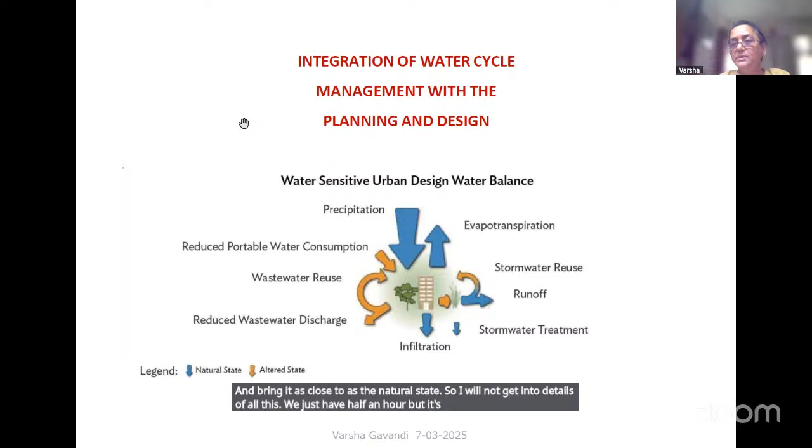So this is just a quick theoretical review of what one is trying to do. The idea is basically to integrate water cycle management with planning and design. We are well aware of what happens in the natural state and in the altered state, and the idea is basically to balance both and bring it as close as possible to the natural state. I will not get into details of all this. We just have half an hour. But it's important to understand what exactly we are trying to do.

The whole objective of this exercise is basically to improve the plant environment, augment water resources, improve their quality, reduce negative impacts of stormwater, and preserve ecosystems in a very cost-effective manner. And obviously, the benefits are numerous. The site or the development becomes resilient, it becomes sustainable, there are ecological, economical, social benefits to this approach.

How do we really go ahead with this? What is the process? As I told you earlier, the ideal way is designing with nature, whereby you understand the larger landscape, the physical or natural layers of your site and the larger landscape within which your site sits, their interrelationships, you map them properly, and then find the suitability for different types of land uses. As I said earlier, very, very rarely do you get this opportunity.

Second, this is understanding and responding to the site landscape, as I said, whether it falls in rain shadow, what is the geomorphology of that particular area, what is the surface, subsurface hydrology layout. So all these things need to be studied, even if we are dealing with, say, a small site of 1 acre in a larger landscape.

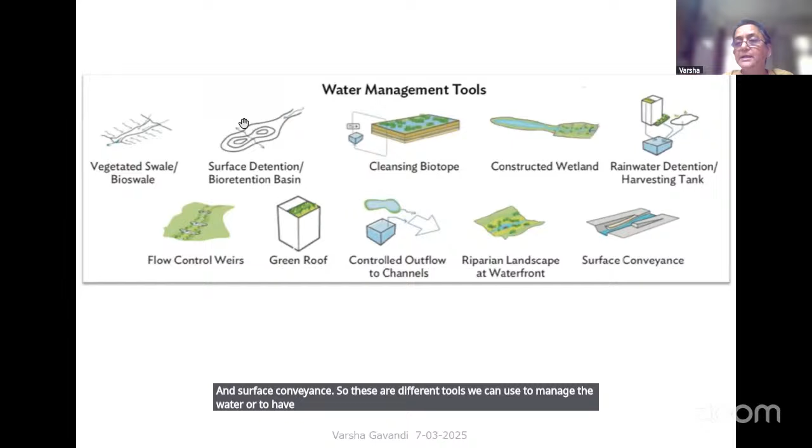There are constructed wetlands, one can harvest water. Then there are flow control weirs, green roofs, controlled outflow channels, riparian landscape at waterfronts, and surface conveyance. So these are different tools we can use to manage the water or to have water sensitive design or site planning. So I'll just take you through some of the examples.

The first example, as I said, is where one, as a landscape architect, is not really involved in land use planning. But once the land use planning is done and it is given to you only for landscape, we as architects, landscape architects or planners, can always expand our scope and educate the client so that at least it helps in the next project. At least they're aware as to what the process should be, at what stage, who should get into picture.

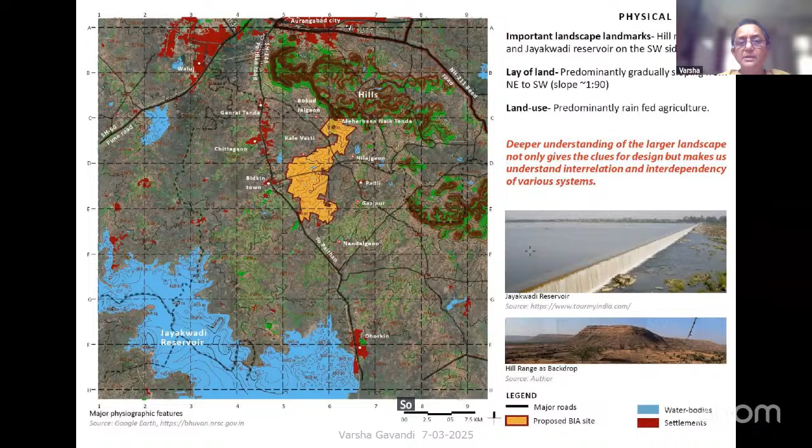So this is a 3,000 hectare site, very close to a reservoir, and on one side of it is hill, and the entire site slopes towards the reservoir. So one has to understand the physical context, climate and hydrology. As I said earlier, for the larger landscape, what is the drainage pattern, and what is the source, where it is leading to. All these things one has to understand, how much water gets generated, and then how much water gets generated within the site.

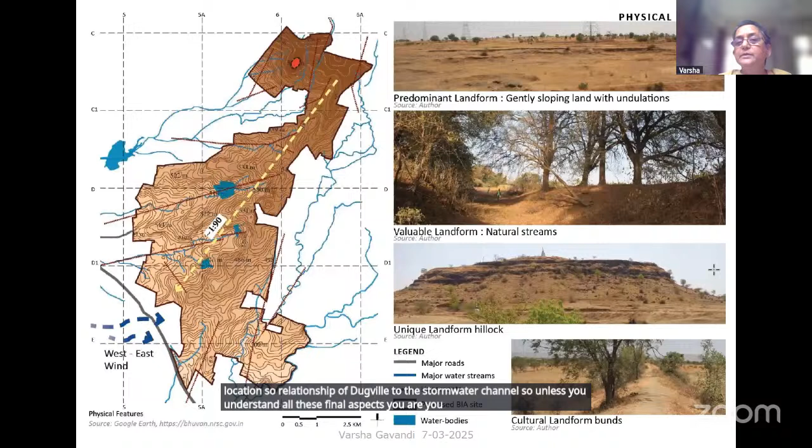You also need to understand subsurface hydrology. That is also very important, because in this particular site, there were lineaments. And because the water table was a little higher, the entire landscape was dotted with dug wells. So you can relate why so many dug wells are there in a particular area, and how they are located within that site. Very peculiar location. So relationship of dug well to the stormwater channel. Unless you understand all these finer aspects, you can't really give justice to the project.

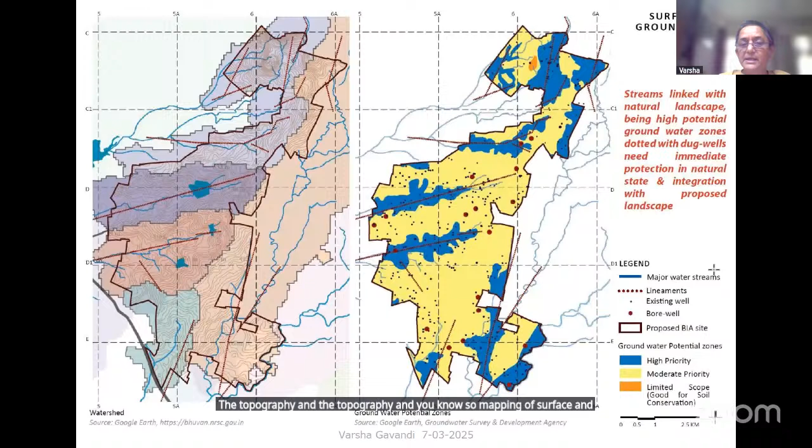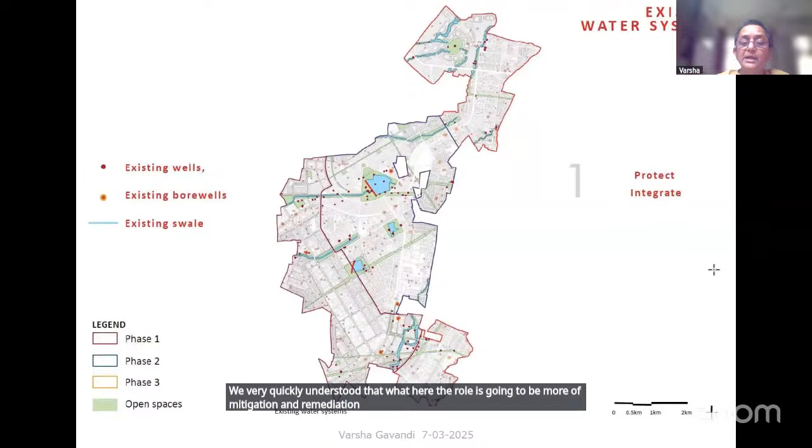The topography, and mapping of surface and groundwater areas. And then you arrive at a policy. Unfortunately, for this particular area, it is only for landscape that one is involved. So we sent our comments on the master plan itself and how it is affecting the natural systems. We very quickly understood that here the role is going to be more of mitigation and remediation, and in some areas where possible, one can protect and integrate.

So then you arrive at your goals. You align the rest of the elements as per the important or major elements, like for example, vegetation. So it was observed that all along the gullies or all along the seasonal streams, there is a lot of vegetation. There are wells. So obviously, it automatically tells you that these areas are ecologically important areas, and they need to be handled very carefully. They need to be integrated within the development very carefully.

Because this is an industrial township, the proposal for the streams was to channelize them. Some part they had already channelized. And so we had to really fight with those people to make them understand that they have to be rehabilitated. They have to be brought back close to their natural state by changing the section, by developing the banks in a certain fashion, understanding flood lines and things like that.

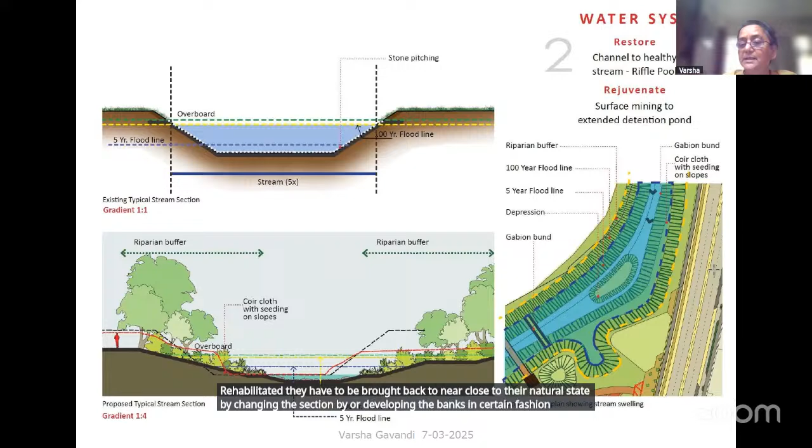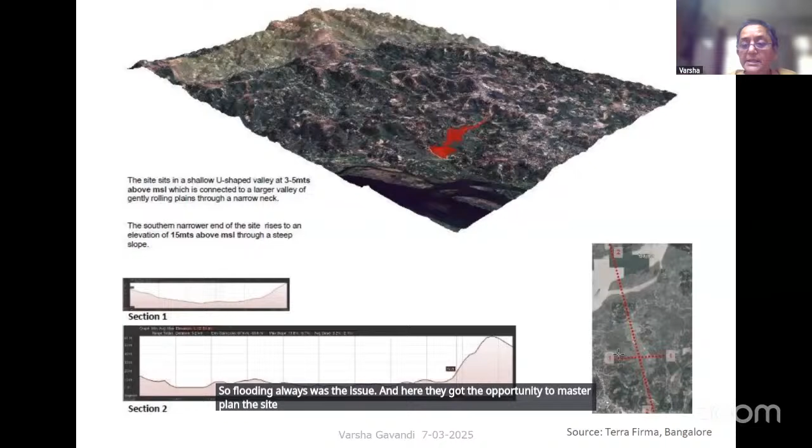There is another example by a renowned architect from Bangalore, Terra Firma, where the site is placed in a shallow U-shaped valley which is just 3 to 5 meters above mean sea level. So flooding always was the issue. And here they got the opportunity to first study the natural parameters and then really come up with the site plan.

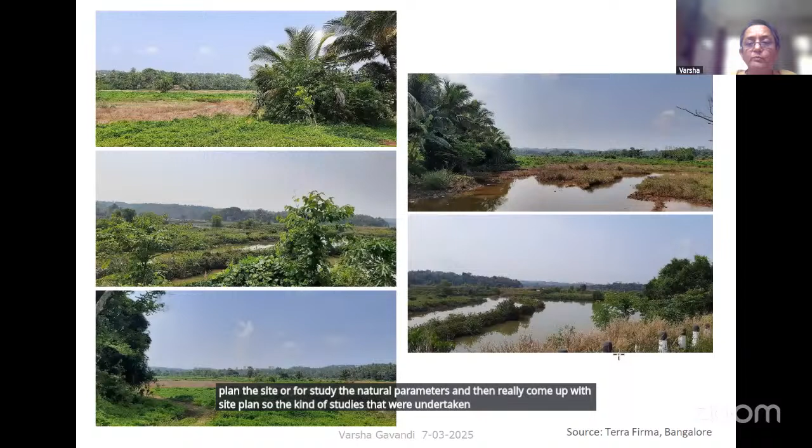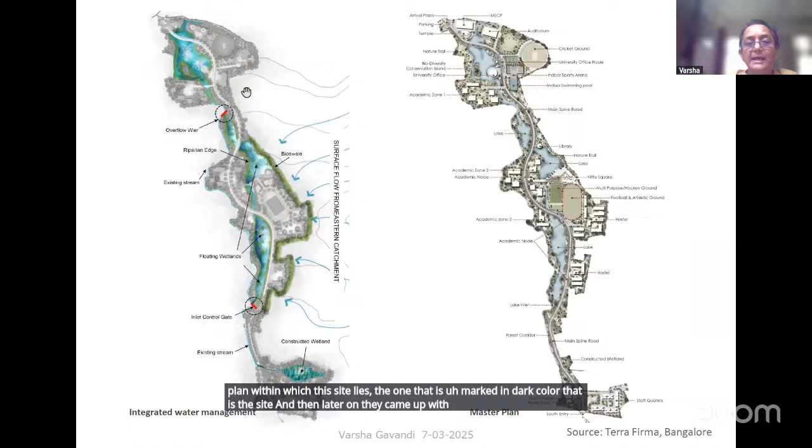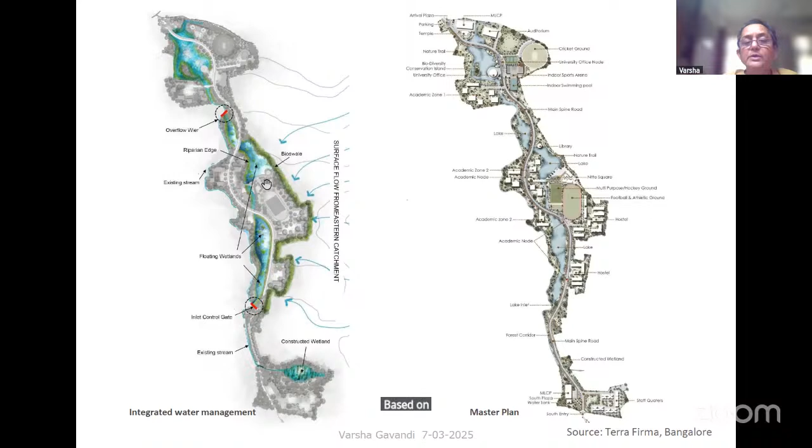So the kind of studies that were undertaken: understanding the catchment, watersheds, sub-watersheds, then the visual surveys. So this is the overall watershed plan within which this site lies; the one marked in dark color is the site. And then later on, they came up with this integrated water management plan, where constructed wetlands, bioswales, overflow weirs, control weirs, riparian edges, all those formed part of the entire scheme. This was for flood mitigation, for protecting the site and development, as well as directing the flow of water. So based on this, development areas were identified and finally the master plan was developed.

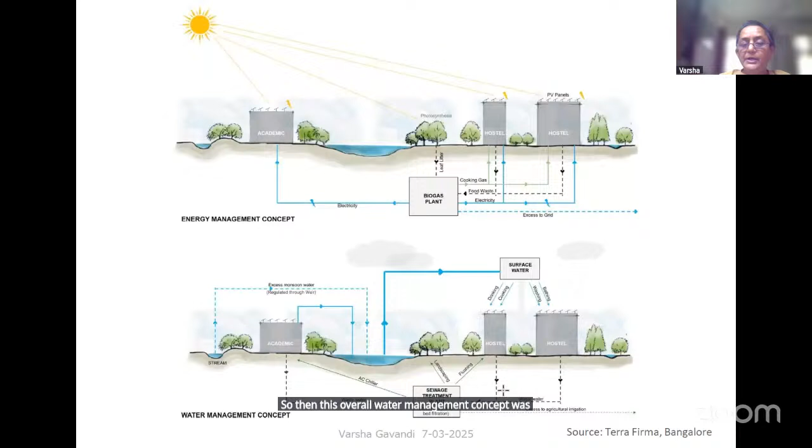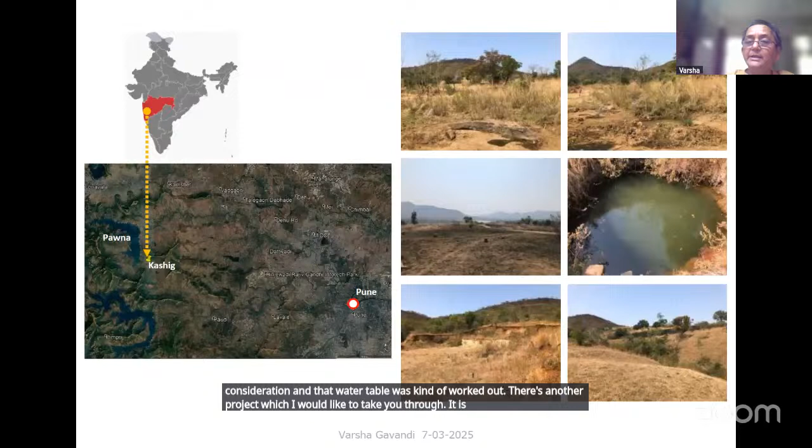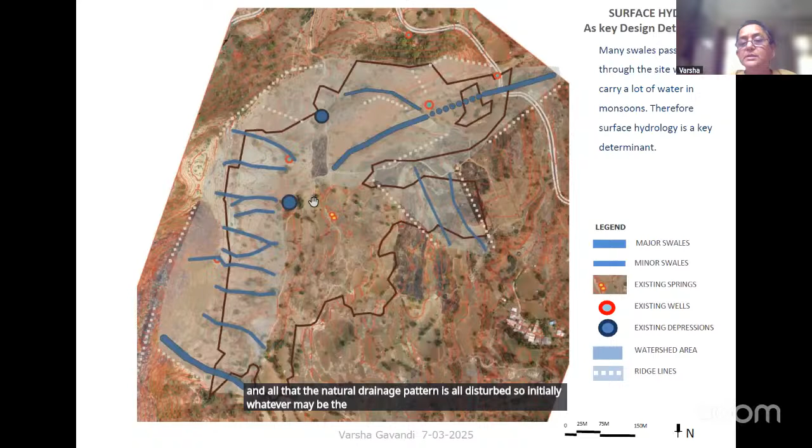There's another project which I would like to take you through. It is in a high rainfall hilly area, basically. The dotted line on the left-hand side is the ridge, and this is in a source area. So this is from where the natural drainage channels begin. And then when they come to the plains, because of farming and all that, the natural drainage pattern is disturbed because of the cultural landscape in that area.

And you also have natural streams. You have wells and existing depressions and things like that. So the plan over here was developing this into a plotted development.

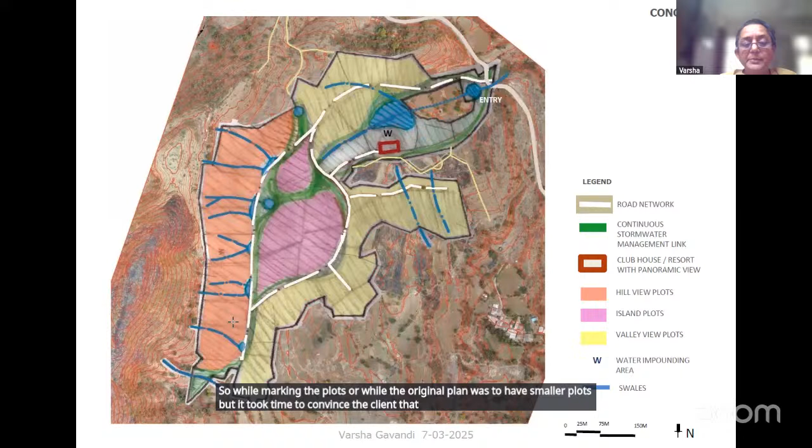So while marking the plots, the original plan was to have smaller plots, but it took time to convince the client that economically they need to see how it works, but at least in the source region, the plots will have to be larger so that the swales are retained and at the same time people get space for constructing to some extent and things like that. But the swales at least will be untouched and they will be retained as they are.

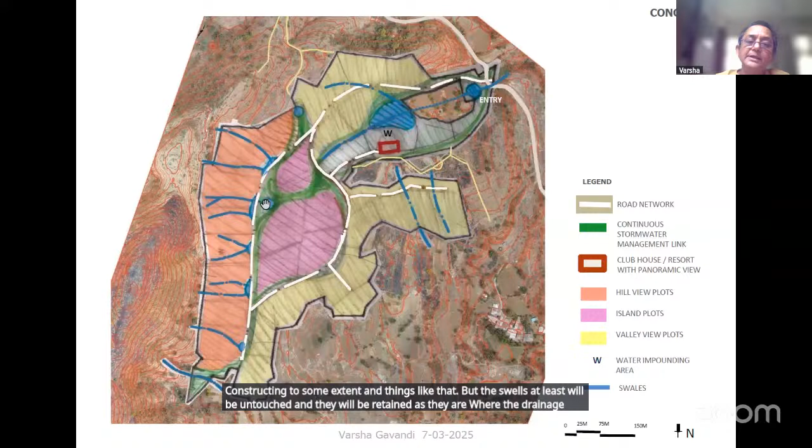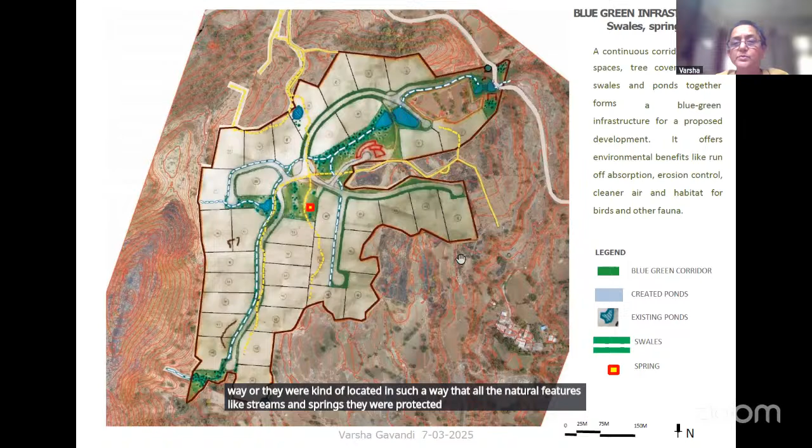Where the drainage pattern was disturbed, green vegetated swales were developed, which took the water through this valley and then beyond the site. And the open spaces were located in such a way that all the natural features like streams and springs were protected. Depressions, streams and springs were protected as much as possible.

So basically, planning is very important based on this. But then detailed design is also equally important because unless you work out those levels, those fine little details to the last detail, if you don't pay attention, the objective may or may not be fulfilled. So detailed design is very important. And I think grading plays a very, very big role in stormwater or water management, surface water management. Also, in some cases, subsurface water management.

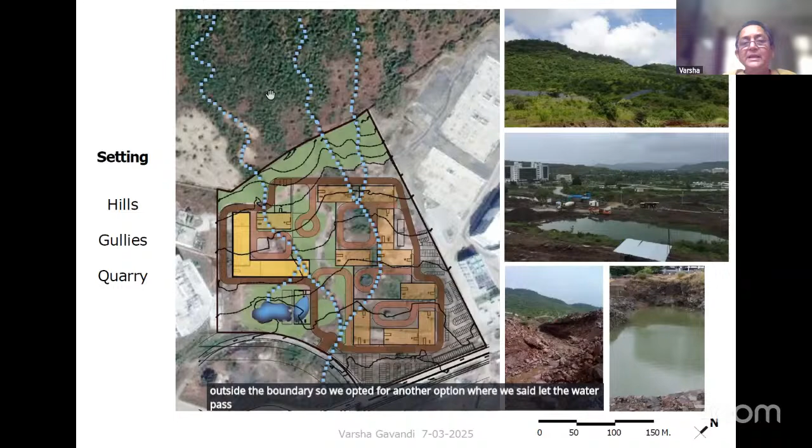So this is another case where, again, it is at the bottom of the hill, not exactly in the source area, but it is a foothill. So part of the hill, bottom of the hill, lies within the campus, and the streams flow through the campus, and they get beyond into an area which is already disturbed and partially so-called developed. So one option was to divert the water outside the boundary. We opted for another option where we said let the water pass through the site, because flow was the theme.

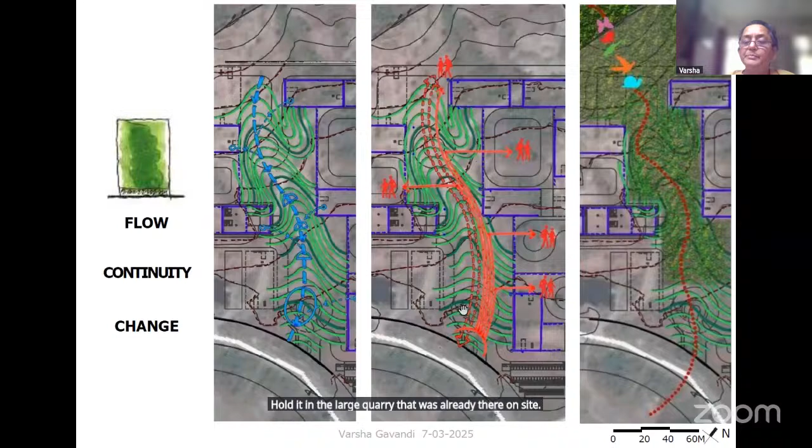So flow, continuity, and change, because this will bring in the change. In monsoon it will be different, in summer it will be different, other seasons it will be different, and this will be an area where people would move, where flora and fauna, in the form of seeds, move. So that was the theme. And what was proposed was basically we develop a valley and bring that water within this valley, hold it in the large quarry that was already there on site, and then beyond the quarry, the water will be left to the rest of the area. So this is how the master plan was developed.

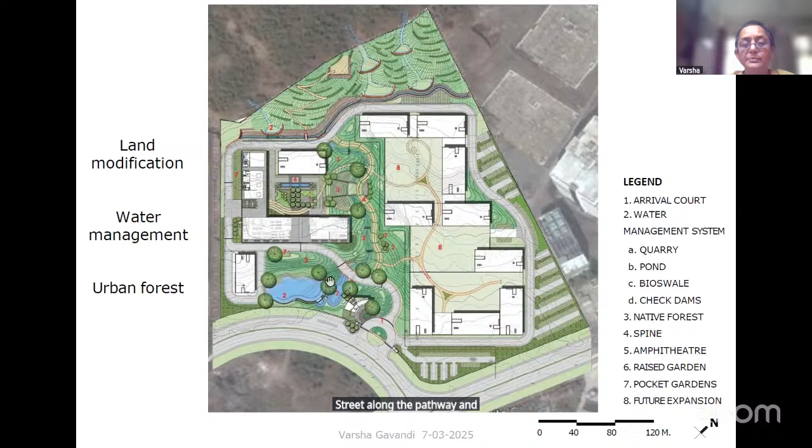Adequate slope treatment was done, like contour trenching, and wherever there was erosion, coir cloths were used, some talis were used to minimize the erosion. The swales had small weirs, so that the water percolated as much as possible. Wherever possible, it accumulated and it percolated, and then finally it came to a swale proposed at the lower area, which flowed below this street along the pathway and got through the polishing pond to the quarry.

So then finally the holding capacity was the quarry capacity. So backward calculations were made. What is the amount of water that we can hold, and what is the amount of water that can be released further? And based on water availability, how much area can be planted, and how can we reduce water consumption later on by using maximum native plantation, giving more emphasis to trees and plantation which is ephemeral. So it grows in season, and it's okay even if it dries off in other seasons. So that is how it was developed.

So this is that swale, and the first season it carried a huge amount of water. Now after a few years, there's a lot of vegetation growing along the stream. Though one thing one needs to understand is these man-made waterways or streams don't really compensate for the natural streams. But this is a midway kind of solution.

If there is no direction to the water, it's better to guide it in some fashion, and it is better to guide it through a vegetated swale rather than a constructed swale. Again, this swale also had weirs so that the water could accumulate for some time. It was allowed to percolate for some time.

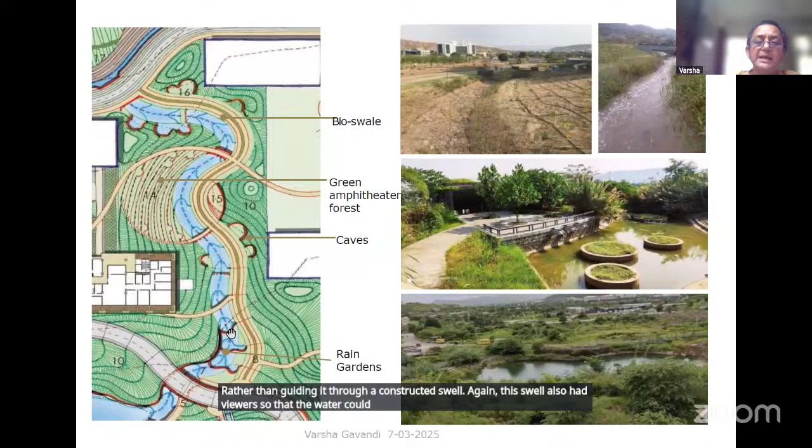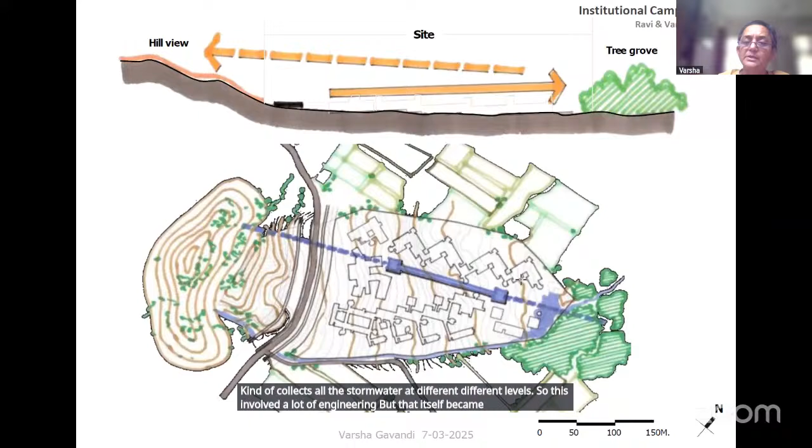So like I said, from planning to detailed design, at times how you deal with levels internally, how you deal with vegetation internally. I mean, vegetation is a different chapter altogether. One can talk for a long time on vegetation and its role in sustainable development. Since the focus today is water, I'll give more emphasis only on water.

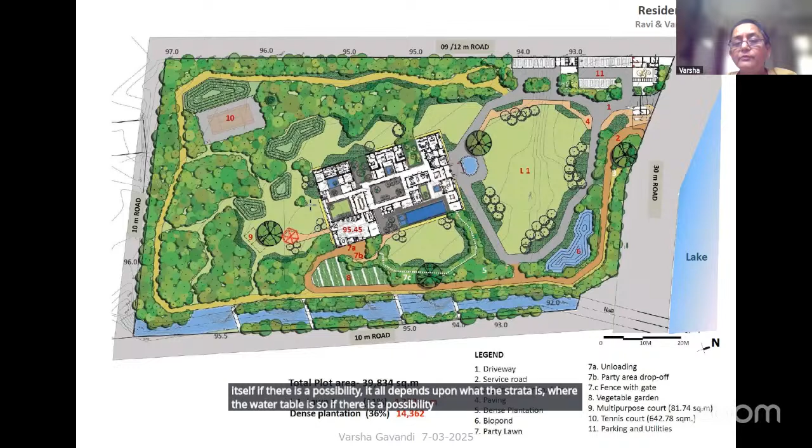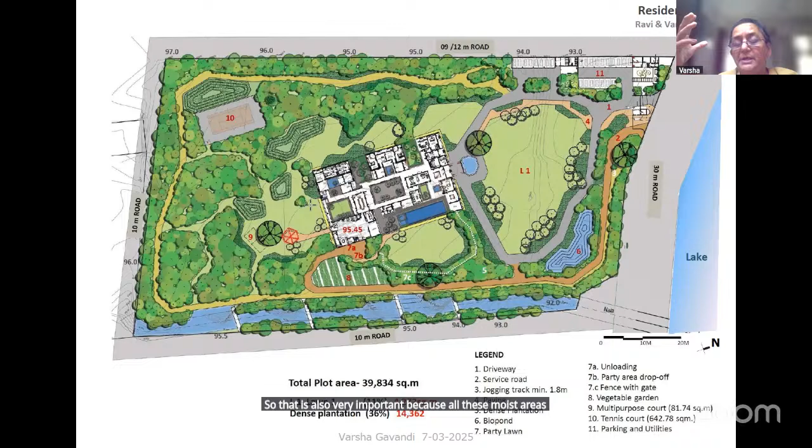So basically, land grading also plays a very, very big role. Within a given piece of land, if you manage the grades in such a way that within the land itself, if there is a possibility, it all depends upon what the strata is, where the water table is. So if there is a possibility, you hold water, recharge water, allow it to percolate, because it reduces the runoff, but at the same time, it creates microhabitats. So that is also very important, because all these moist areas create microhabitats, and they remain moist only seasonally, not throughout the year.

So this map clearly says that the slope is more or less in one direction, but within the site, you could create areas where it slopes away from the structure in every direction, but within those areas there are depressions which hold the water for some time, and then it percolates, and then the overflow of these depressions is only taken forward to the natural stream beyond. So within the site also you can actually play around, and the idea here is to have minimized constructed drains, so that more and more moist areas and percolation is promoted within the site.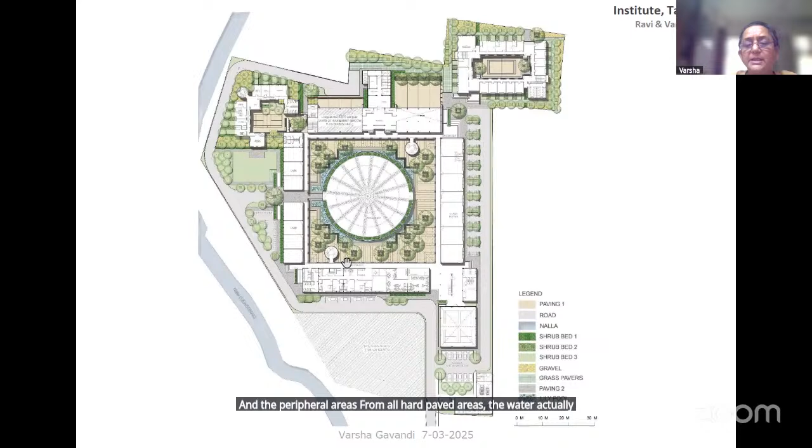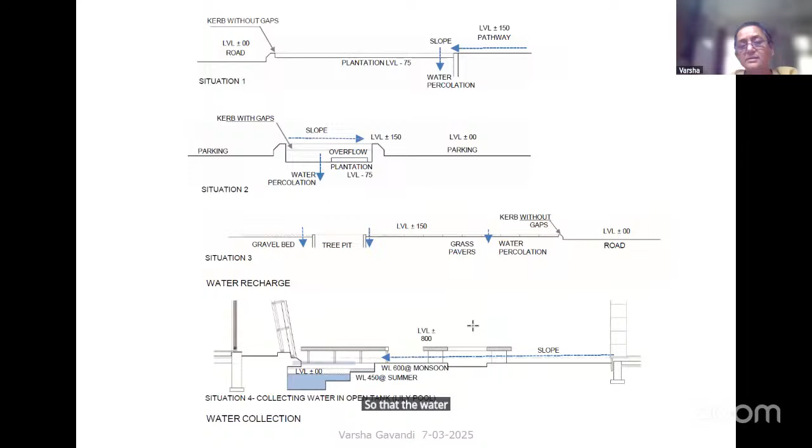So the idea basically was the central courtyard and the building roof, the water was collected within this water body along the courtyard. The water body is designed in such a way that you have summer level, you have monsoon level, and this in itself is treated like an irrigation supply tank for most of the area. And in the peripheral areas, from all hard paved areas, the water actually gets into the vegetation area. So all those areas indicated in light blue are the areas where the water is diverted and allowed to percolate. So then how do you manage curbs, how do you manage levels so that the water gets into these areas, is interesting to work on.

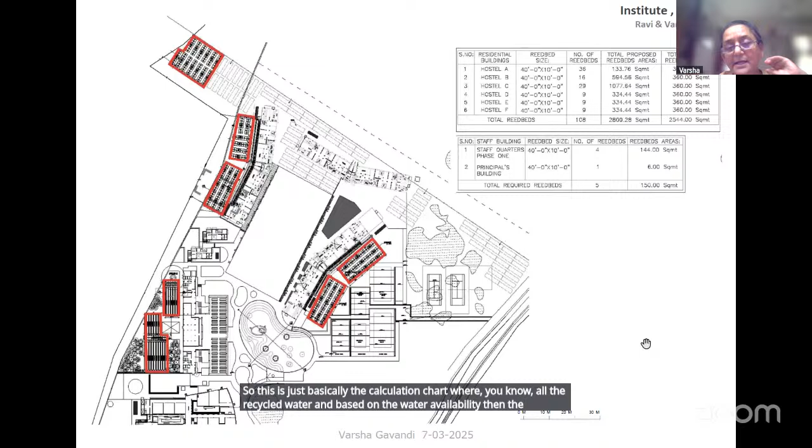Another example where, there being hostels and the population being substantial, the entire wastewater is actually recycled through the reed beds that are indicated. So reed beds themselves become part of the overall landscape. This was in conceptual stage, so they did not take really interesting forms, but there is a possibility of converting this into an aesthetically appealing garden. This is basically the calculation chart of all the recycled water, and based on the water availability, the soft areas or irrigated areas were decided.

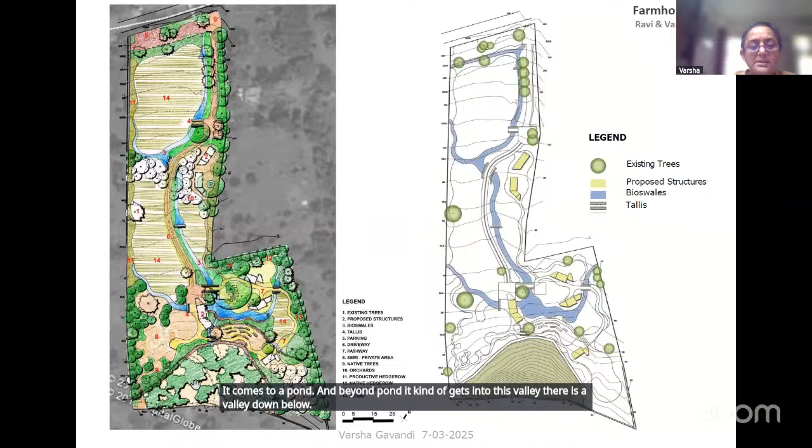Another example where basically a depression is created to separate the areas to control erosion, the soil that flows, because this is all good agricultural soil. These otherwise remain as moist areas all around. There is only native plantation, existing forest is retained. It comes to a pond, and beyond the pond, it gets into this valley. There is a valley down below, and there is a pond at a lower level also. So these are the ponds that are created at different levels.

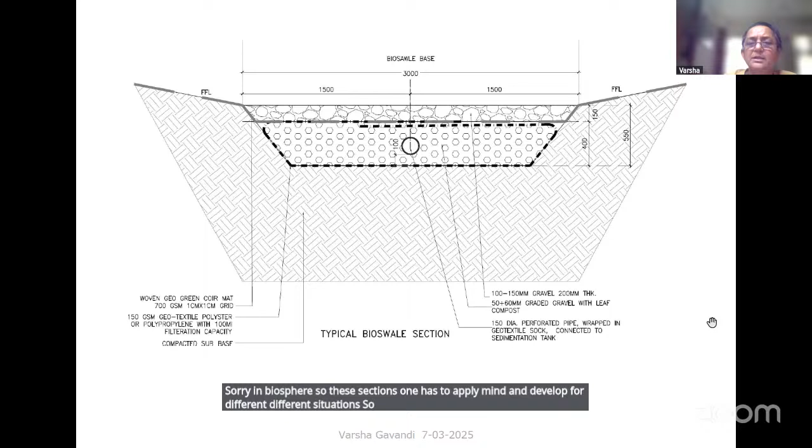Swales, bioswales, even the pond construction doesn't have to be a hard pond. Sorry, rain bioswale. So these sections, one has to apply mind and develop for different situations. We did a substantial amount of research to find out what are the standard sections. Then we realized that it has to be site specific. It has to match your requirements, and it has to serve that purpose. So rain gardens.

Another example where a stream or a water course passes through the site, already disturbed within the site, highly disturbed within the site, and highly channelized by the site above. So it's higher in level, already disturbed by them.

So then basically you can create waterways which eventually look very natural. They function very well because you have vegetation on the side. So things start growing within the water bodies. Even though they are dry during summer, they don't really look unpleasant. So design intervention, wherever possible, you should kind of protect.

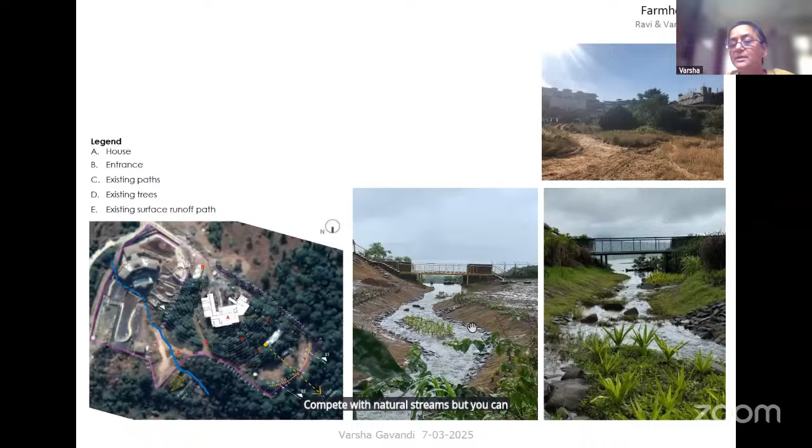But if it is not possible, if they don't exist at all, and if you have to recreate something, you can take clues from nature. They can never imitate, or they can never really compete with natural streams, but you can take clues from nature and really create waterways.

Then within streams, there are certain interventions. There is a very nice book by Dr. Prakash Gole on stream restoration, a very small booklet, which tells you about all these methods of at what place you should have these half moon bunds, which hold the water for some period, and they become habitats for fish.

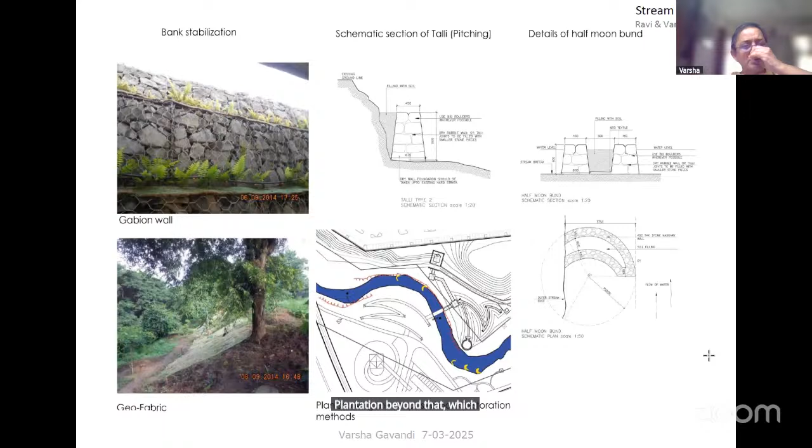So fish ladders within the streams, half moon bunds, and tallis that allow percolation, but at the same time they hold the soil and control erosion. Then coir cloths and liners for the sides where the slopes are eroding, and of course plantation beyond that, which will hold the sites. So all these can be adopted for natural streams which are disturbed.

This also, actually, I had a video, but I was not sure whether I'll be able to play it because it was very heavy. So it is, again, on a high rainfall area. For this particular bund, we took guidance from people who assisted Rajendra Singh ji, and they told us very interesting things: out of the existing vegetation, you can use certain types of dead vegetation within these tallis as reinforcement and things like that.

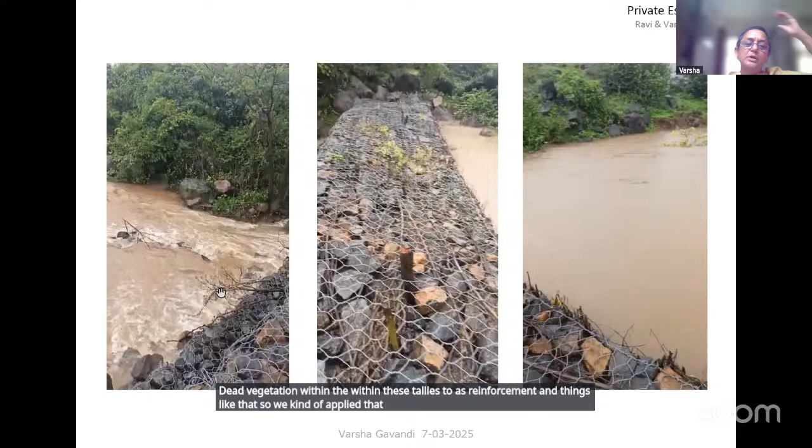So we applied that, and then it holds water for a substantial amount of time, but at the same time it allows the excess water to percolate through. So hard bunds are not always recommended unless they are very low bunds. If they are a little higher, then they should allow percolation of water through the bunds.

Again, coming to detailed design, I think this is the last one. First of all, within any development, we have spoken about water budget and all that, but you can also think of innovative methods and aesthetically appealing details which reduce the plantation area and allow water flow. Because this being on podium, we wanted something which served three purposes: setting for the building, because the building was supposed to be floating above landscape.

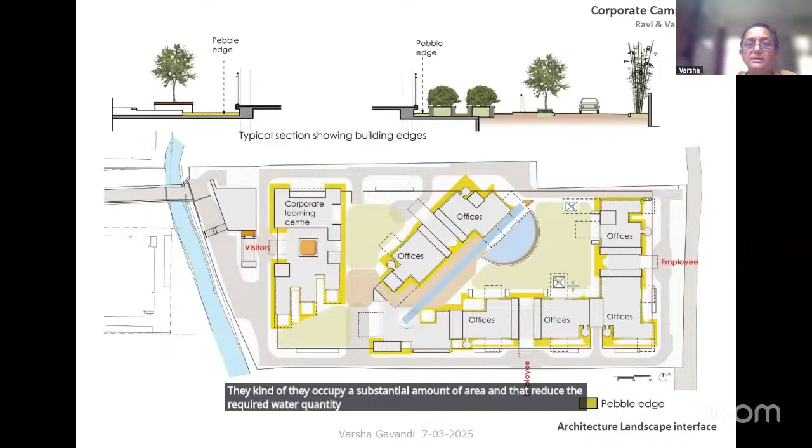Then easy passage for water on the podium slab. So we had to use minimum outlets for the slab, because the slopes carried the water to a certain area. And though these look like very thin beds all along the building, they occupy a substantial amount of area, and that reduced the required water quantity by a substantial amount. So how you choose vegetation, how you detail out the areas, how you create opportunities for water percolation, they matter a lot in detailed design.

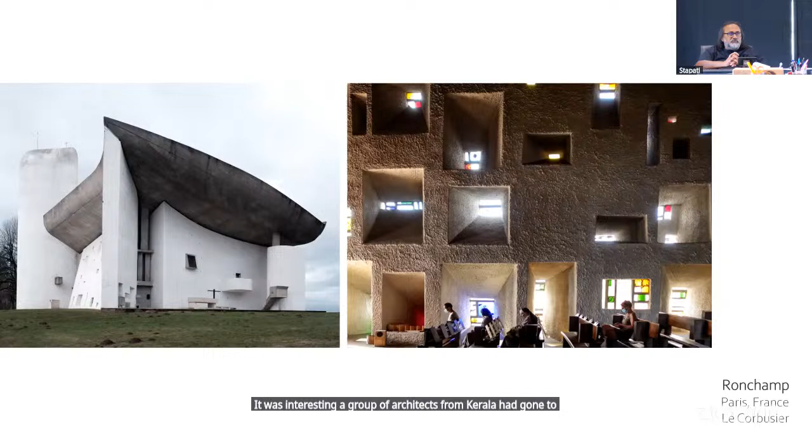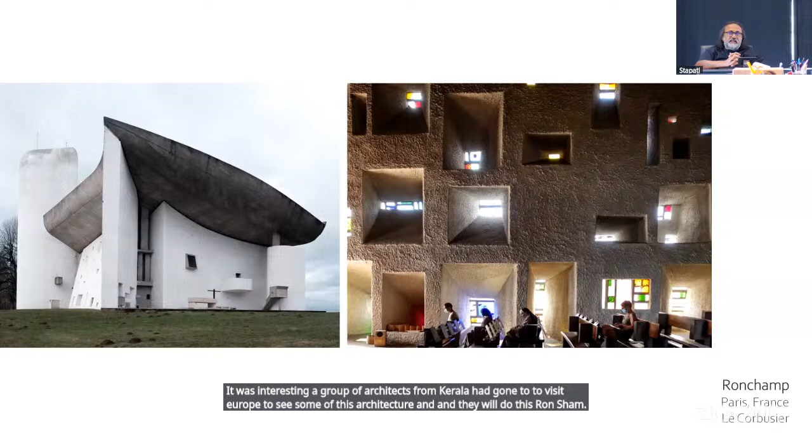And Corbusier, although he was a modernist, a lot of his buildings were very, very emotive. Like one of them is the Ronchamp Cathedral in France. It was interesting. A group of architects from Kerala had gone to visit Europe to see some of this architecture, and they went into this Ronchamp church there, and a few of them were crying. These architects were very serious people who walked into that, and somehow they were so emotional that they cried.

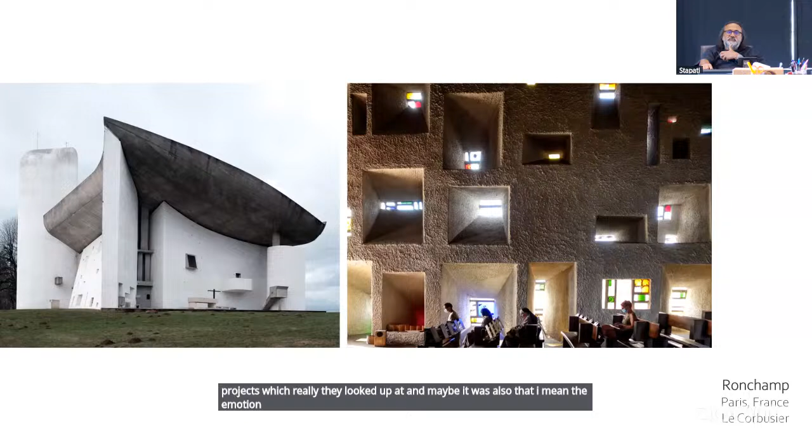Maybe it was not only because of the architecture there, because they were seeing something which in college was one of their projects which they really looked up to, and maybe it was also that. I mean, the emotionality can come due to various reasons. One of the interesting new projects where emotion played a very key part in the design was the Jewish Museum in Berlin, done by Daniel Libeskind. And it was an incredible experience when you go there.

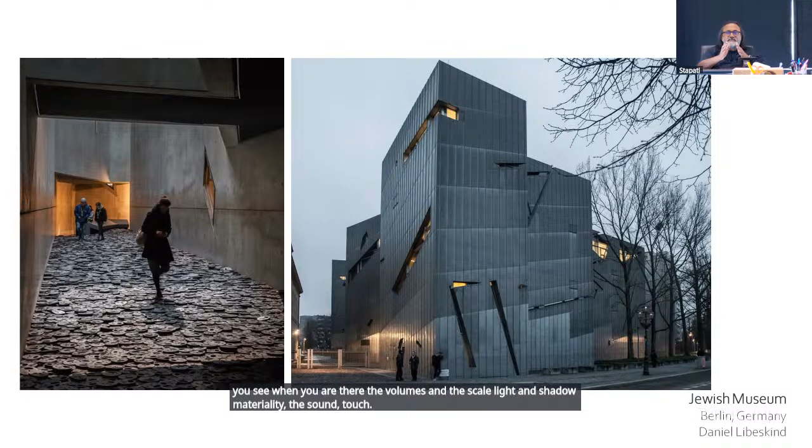Everything about the museum was how to bring back the emotions of when millions were burned by the Nazis. And when you walk through those spaces, the things which you see when you are there, the volumes and the scale, the light and shadow, materiality, the sound, touch, everything played a part in this design. These are the elements which make a building emotional. I mean, these are the things which create an emotive quality to a building.

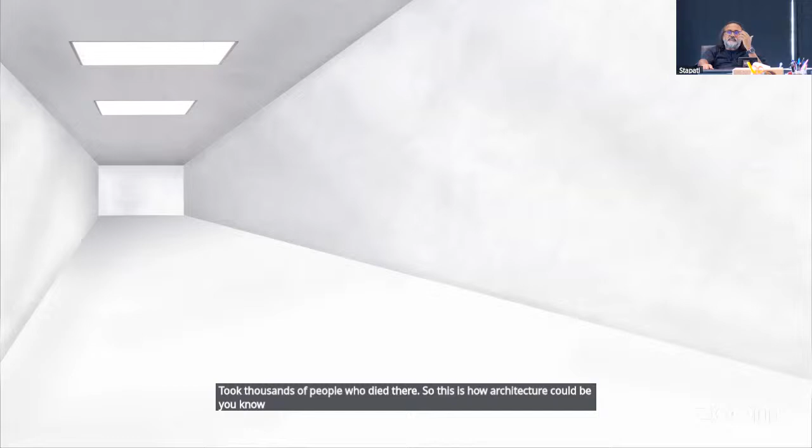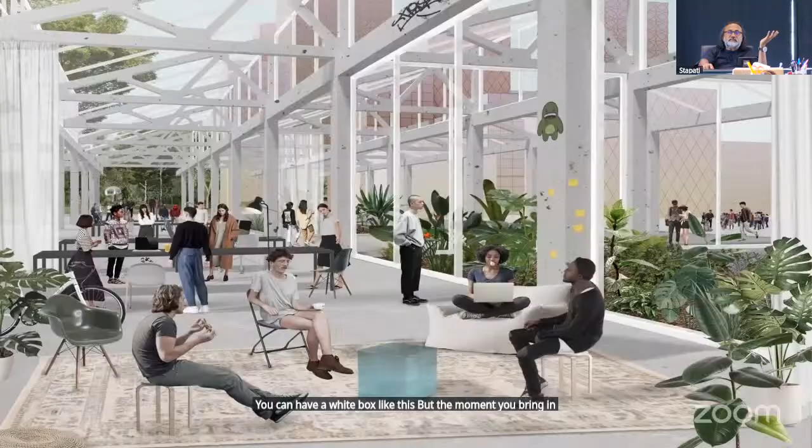You can have a white box like this, but the moment you bring in the same space, you open up the windows, you bring in the trees and greenery, you open it up to the scenes outside, and you play with it, change the flooring, you bring in the materiality and all those things. It totally changes. So this is how architecture can change a space, and this is a simple drawing which illustrates how something can be changed by just making differences in how you do that.

So effectively it is about scale and the space which can make a place emotive. It can be the light and shadow which can play on you. It can be the color and materiality. The materiality can be anything, the textures, the plants, the trees, which can change a space. The sound and touch is a very important thing in changing a space. And all these things combine to create a space. Finally, you say when you enter a space, the space has to enter you. I mean, that is how a good building works.

And Luis Barragan always said that architecture is an art where one consciously or unconsciously creates aesthetic emotions in the atmosphere, and when this environment produces well-being. So that is what architecture should be doing, and that is what we should be trying to achieve.

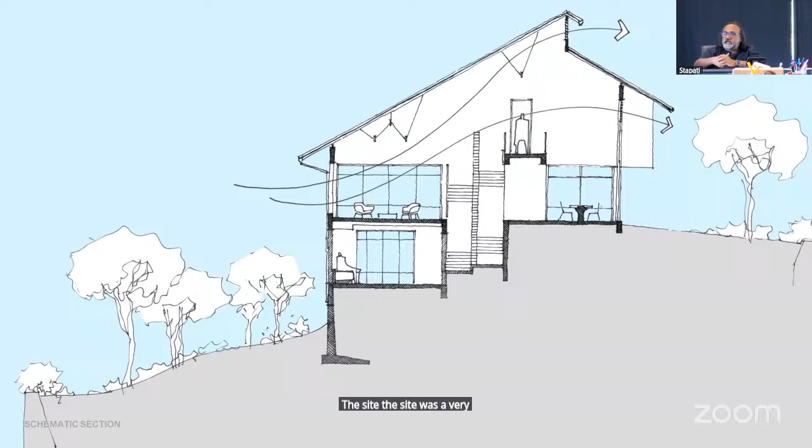So I would start with a project which is in Calicut, a residence. And I have to say it is my own residence in Calicut. There was not a blade of grass on the site. Actually, when we started, it was a sloping site with 1 or 2 cashew trees. That was it, and a lot of rocks and boulders there. It was a laterite soil. Not a blade of grass. I think I started the project 7-8 years back.

And what happens is that when an architect does his own house, he spends the least time. Fortunately, my wife was there pushing me, so I had to go there once in a while. Otherwise, you design and then, until it is somewhat nearing completion, you don't get into it, and you get involved in the finishing part of it. Anyway, the design was taking into consideration the axis and the slope of the land.

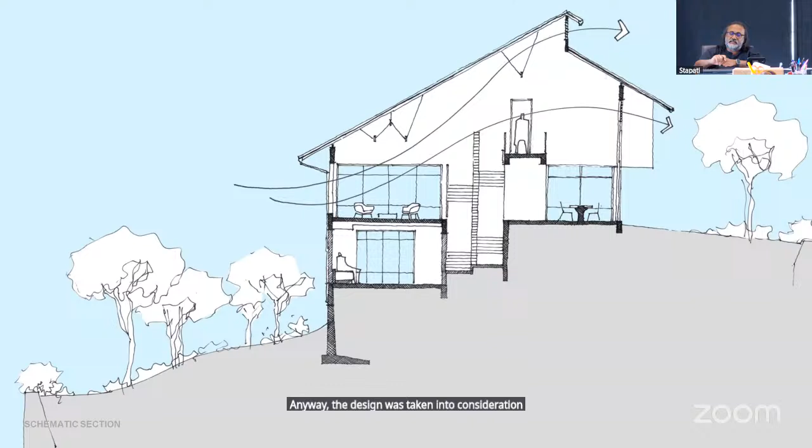And as an architect, you are not like a big businessman. You have to be very careful about the money you are spending there. So every material mattered, every level mattered, everything which we did there mattered in terms of pricing and the cost and the money which was being spent. In a way, it was a blank canvas because there was not a single tree on the site, and there was not even a shrub there.

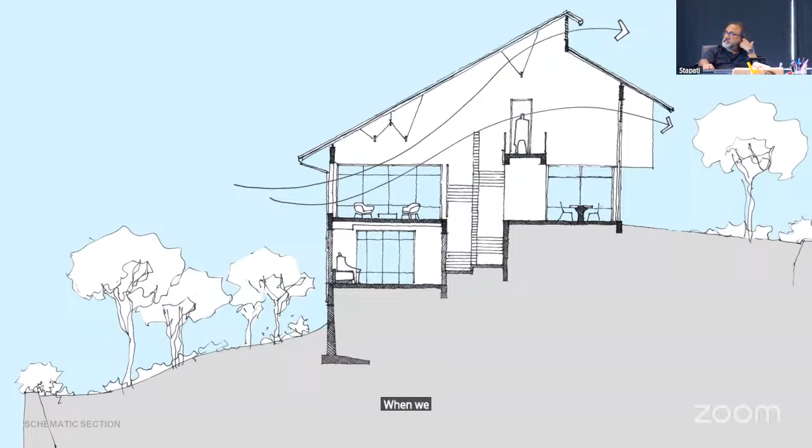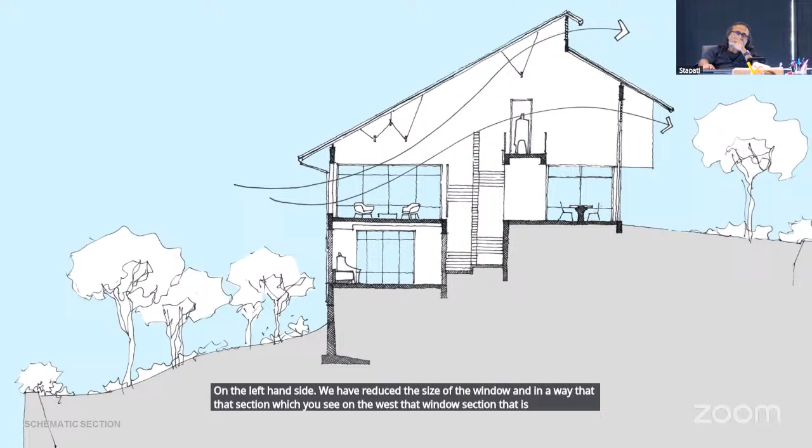So the site on the left side is the western side. When we designed it, we made sure that the eastern side we opened up. On the right side, the eastern side, you have the large windows, which are protected with big overhangs. On the left-hand side, we have reduced the size of the window, and that window section which you see on the west is the only window which has got a double glaze. Even though it's a smaller window, it is a double glazed window.

All the rest of the windows are just a single frame because it is all covered and protected from the glare. On the right side, we have a glass window. On the top, a portion is still only a net so that there is a continuous airflow. There is only a netting on the top. And this portion of the house, the main living area, doesn't have permanent air conditioning. It is only the fans. Even in the worst of summer, we are fine there.

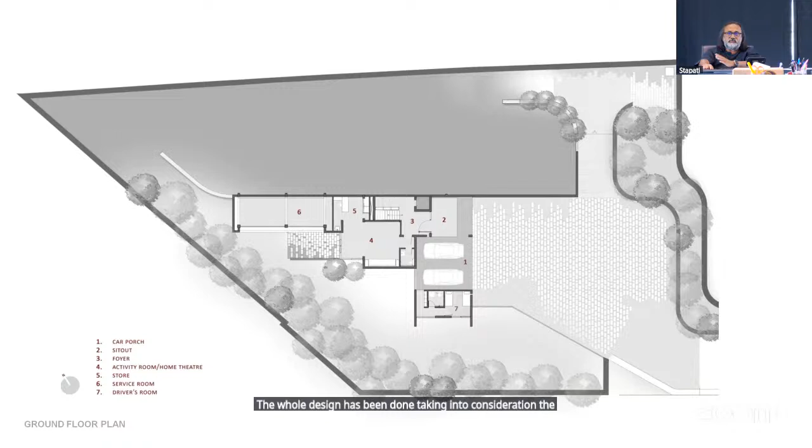So the entry is from the right side. You can see the entry. We enter at a lower level, and so we come into the house. We have the parking and all there. The whole design has been done taking into consideration the slope of the site to reduce the amount of cutting and filling.

Then you come up to the top level where the main house opens up, and in a way this shows somewhat the residence.

And anytime you come to Calicut, you can come over.

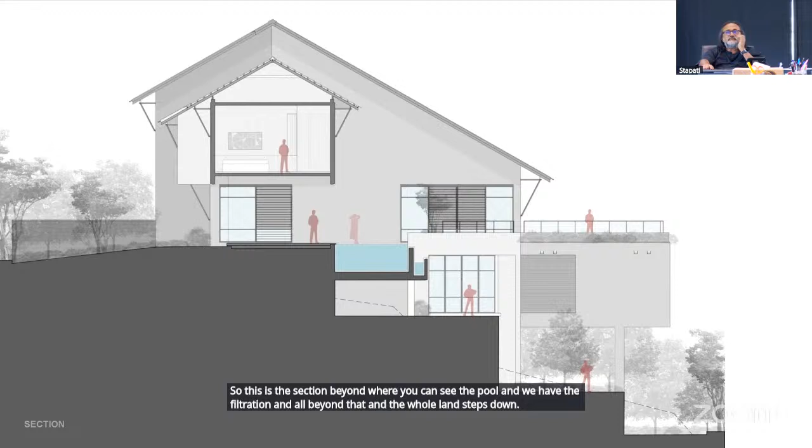So the materiality of the house is kadapa, which is the cheapest stone we can get. The walls are all white cement and cement. No paint has been used in the whole house. Outside it's still only the plastering, which has been buffed, nothing else.

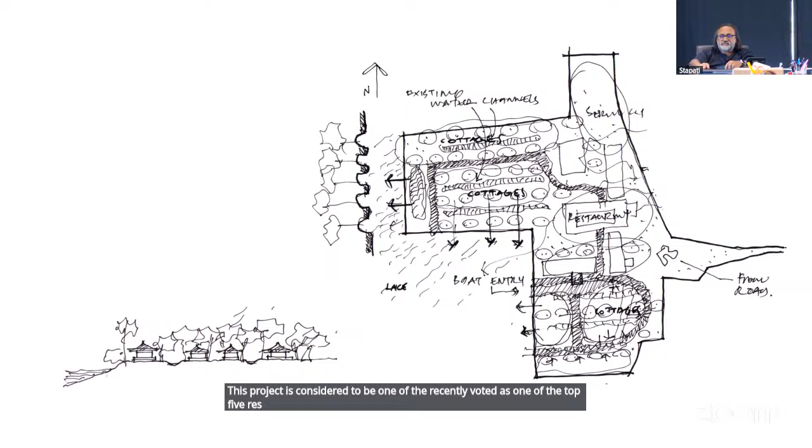Then we have one of the projects which I started about 30 years back, when I was just about 5th or 6th year into my practice. And even 25, 26 years since it started functioning, this project was recently voted as one of the top 5 resorts in India. This is in Kumarakom. It is called the Kumarakom Lake Resort.

And the site, as you can see, was a coconut farm in a marshy waterway. What they did there was dig up a little of this marshy soil, scoop it up and plant coconut trees. So you had all these lines of water body with these coconut plants in between. In the plan, you can see the lines of coconut plants there.

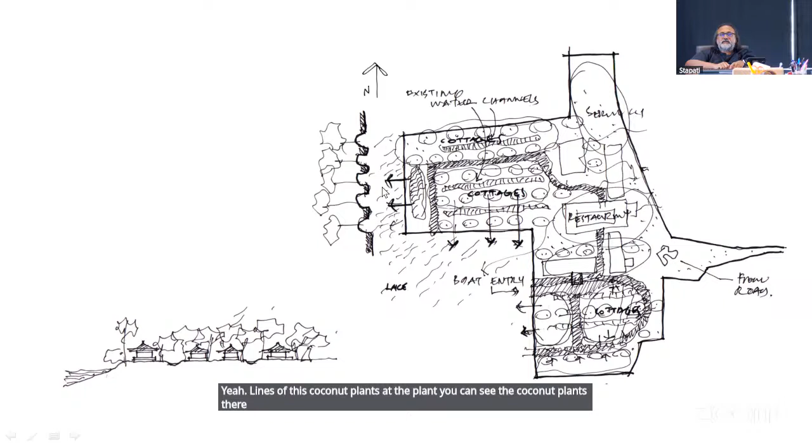I can just show you that. And it was in a way a small coconut plantation there. So if you can see my cursor, can you see my cursor? Yes, sir, we can.

So these are the coconut trees, and they used to have these streams of water there in between, and they'd scoop up that soil and create these coconut patches. Here also it was the same. You had this line of coconut trees. So on the section you can see the coconut tree, the water body, coconut tree, water body.

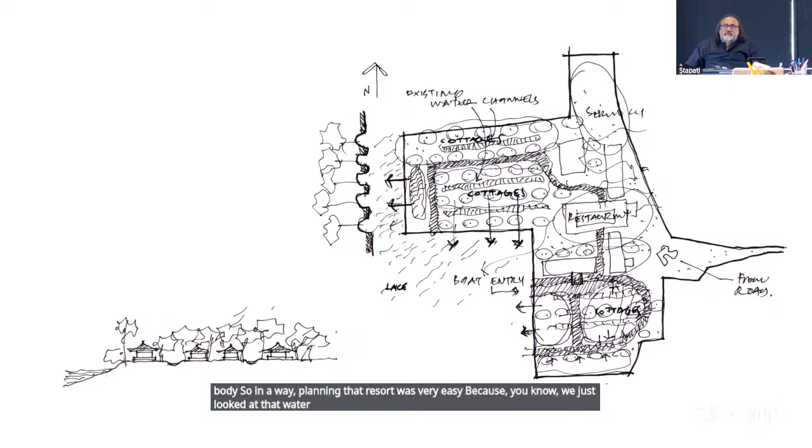So in a way, planning that resort was very easy because we just looked at the water bodies and trees. We tried to retain some of the water bodies and some of the coconut trees, and we just built whatever we wanted there. So in a way, in most cases, the site tells us what to do. And in this case, the site was very clear on what we should be doing.

I started working on it about 30 years back. At that time, Kerala architecture was looked down on by everybody. Everybody wanted very modern architecture. And we felt that we had to bring it back; if a tourist is coming, they would love to see what Kerala culture was all about. So here's a project where we tried to bring back what Kerala was all about.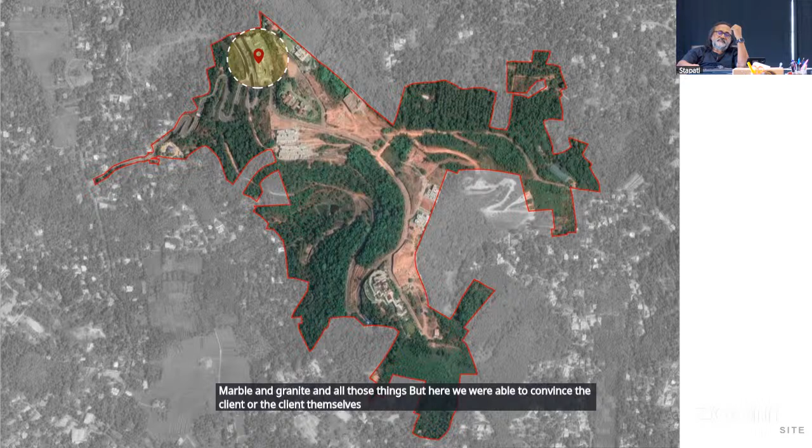Usually when we talk about somebody who's in the business of gold, we would expect a lot of marble and granite. But here we were able to convince the client, or the chairman himself had a lot of clarity on that. He wanted something which went along with nature. The issue was that we had to have a building which could house all their requirements and all their cars. So I think we have to go faster.

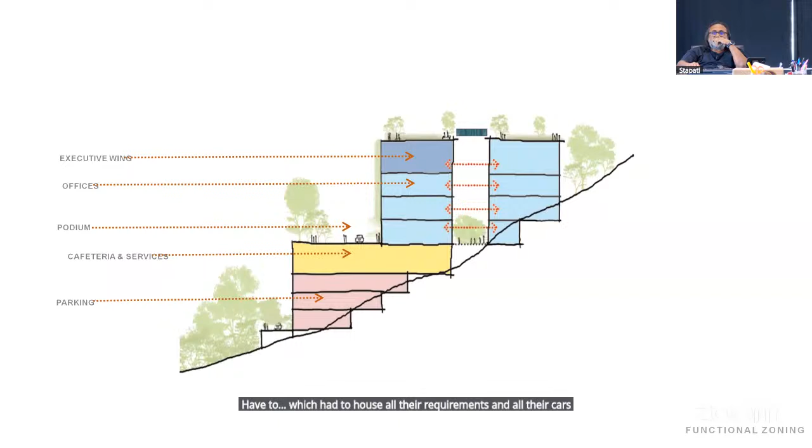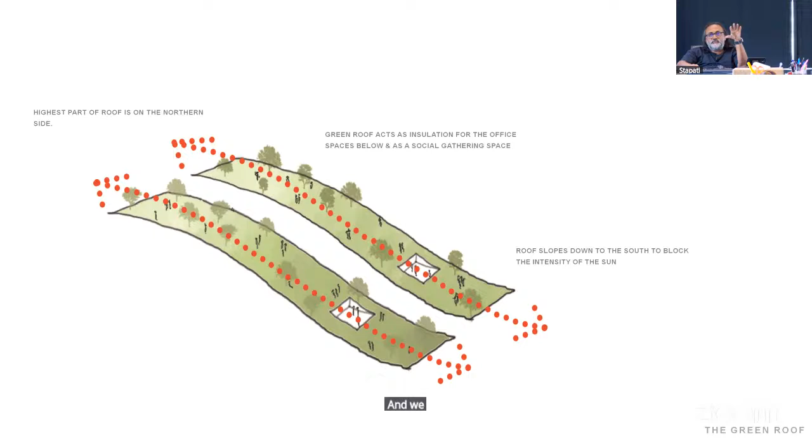So this shows how we could do a large, modern building, and at the same time work along with the context. It was on a hillside, and we decided that it could merge with the ground there. The slope would be towards the southern side, so we could open up the northern side with bigger windows. And on the south, we had landscape which would cut down the heat.

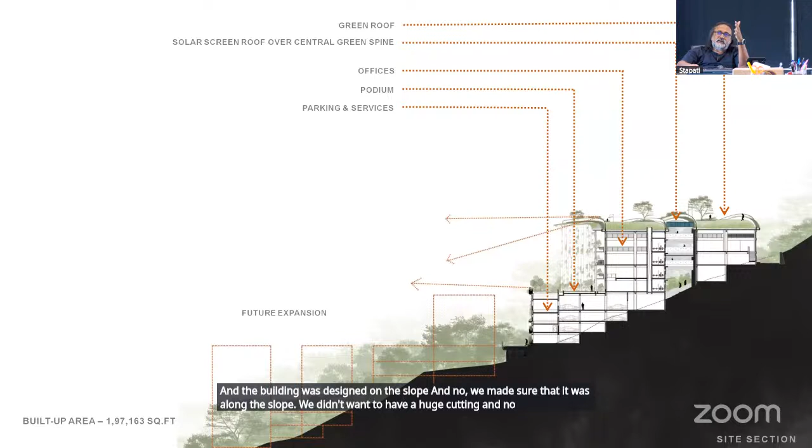The building was designed on the slope, and we made sure that it was along the slope. We didn't want to have huge cutting and destroy the whole landscape, the contour there. Since the hill was on the eastern side, it was blocked from there.

So it was blocked from there. We have created a whole courtyard there in between, so that we have beautiful lighting there. And the west side, the problem was the hill was sloping from east to west, which is against the Vastu. But then they seem to be doing quite well. So at the end of it, more than the Vastu, I think when you go to a design in a site, respecting the land is more important than worrying about the site.

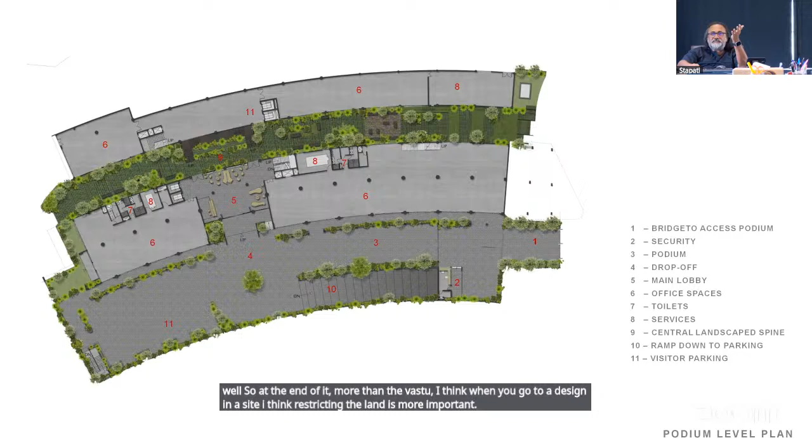I have had issues in many places where if you have a land which slopes to the west, we were asked to build up the west and slope it down to the east. Here, we worked on the existing slope. And this is the internal courtyard which was created. These are the different levels.

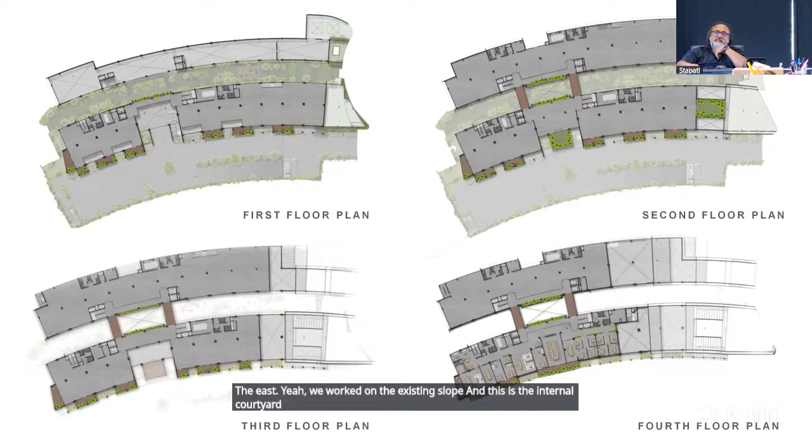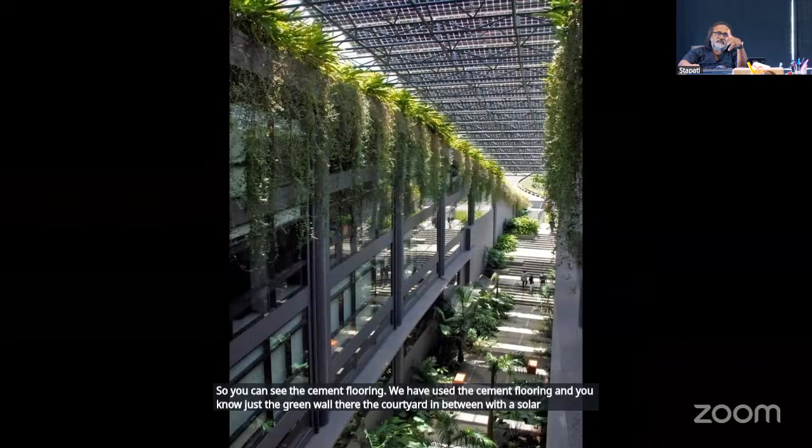So you can see the cement flooring. We have used the cement flooring, and just the green wall there. The courtyard in between with the solar, which provides about 30% of the power requirement there. And this is how the building looks from the top. We have landscape. This was when the landscaping was happening. And this is how people are using those spaces.

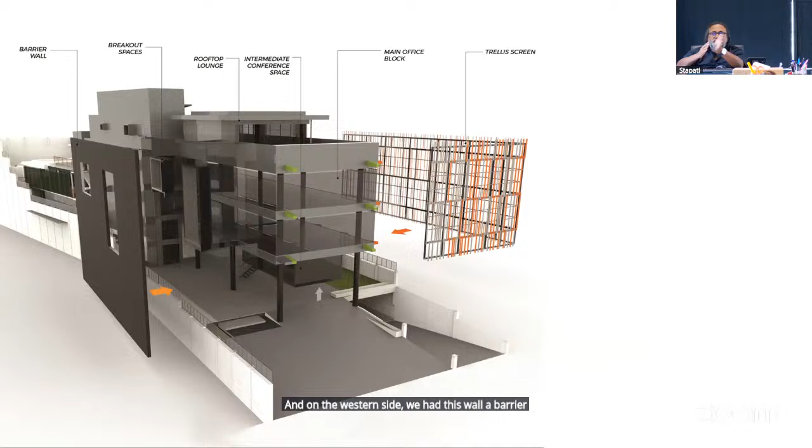And this is how the building looks. The screen is to the front where there is a highway. And this is where you enter the building. Actually, at this level, we didn't break it into rooms. It opens up into the landscape. So the landscape is taken into that space there.

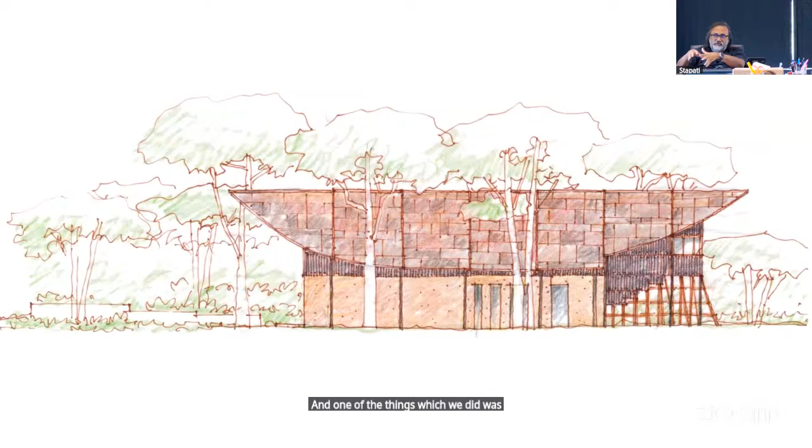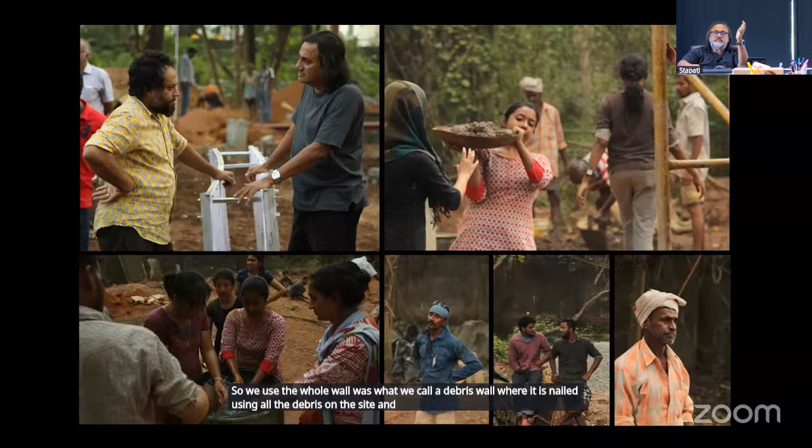And one of the things which we did was we used the materials on the site. There were previous biennials which had happened there. There were a lot of blocks of brick and this and that there. So the whole wall was what we call a debris wall, made using all the debris on the site. A lot of students came to join in creating this project. And we know Daniel, he's on the left. He helped me in creating this wall.

And we used the stones and other things which were left there. And we used materials which could be recycled and which could be reused and which were already used. The whole roofing was flex sheets, which we bought for 3 rupees a square feet from used hoardings. And inside, this is the pattern which we created on the wall.

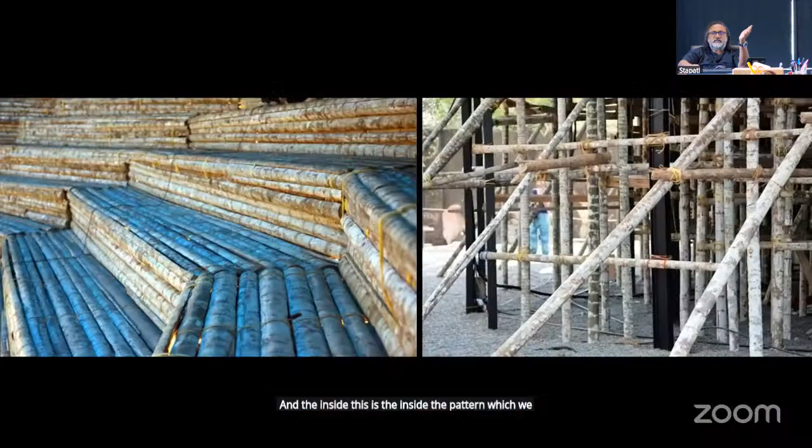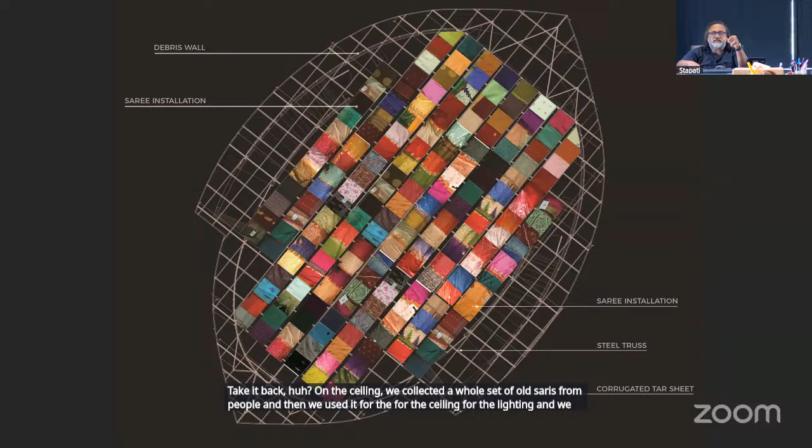This is the material where in Kerala people come and make temporary galleries. We used those guys who come and make temporary galleries. They make the galleries, and when the event is over, they take it all off, take it back. On the ceiling, we collected a whole set of old saris from people, and then we used it for the ceiling, for the lighting. And at the bottom, you can see we had this lighting below, which would change color and create a whole sort of drama in the whole place.

One of the conditions for the biennial was that they wanted an air-conditioned space because of the noise levels around and the mosquitoes around. So in the front of the stage, part of it is concealed. There is an AC vent which pushes the air out.